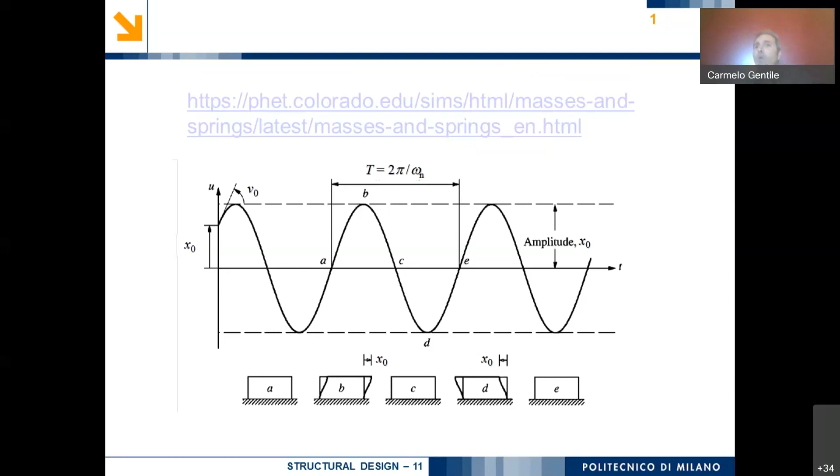But if we have several buildings on the same site, characterized by different masses, different stiffness, and so different natural frequencies or fundamental periods, we have a situation very similar to the one illustrated in this movie—the same mass connected by different springs, springs of different stiffness, to the ground.

What's happening is that when the natural frequency of the oscillation induced to the ground increases and reaches the natural frequency of one of these single degree of freedom systems, the response and also the force increases a lot.

So basically we discussed this aspect in some detail in the past lecture, and I would like to briefly recall it before beginning today's lecture. So, first of all...

Let us refer, for example, to a system like this with no damping, a certain value of the spring constant, and a certain value of the mass. As we said, when we move this system from the equilibrium position, an up and down motion begins. This up and down motion is a sinusoidal wave.

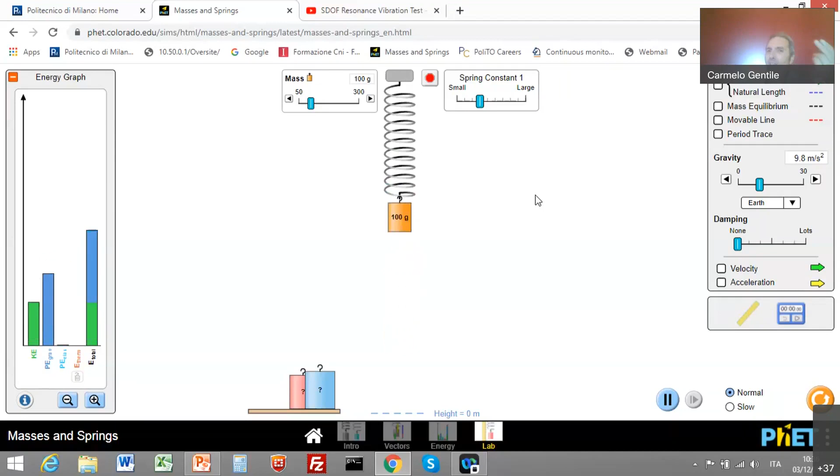In addition, regarding the effect of mass: if we increase the mass, the natural frequency decreases; if we decrease the mass, the natural frequency increases. If we deal with the inverse of natural frequency, that is the fundamental period, the effect of mass and spring changes is basically the opposite—in terms of stiffness, if I increase the stiffness, the fundamental period decreases.

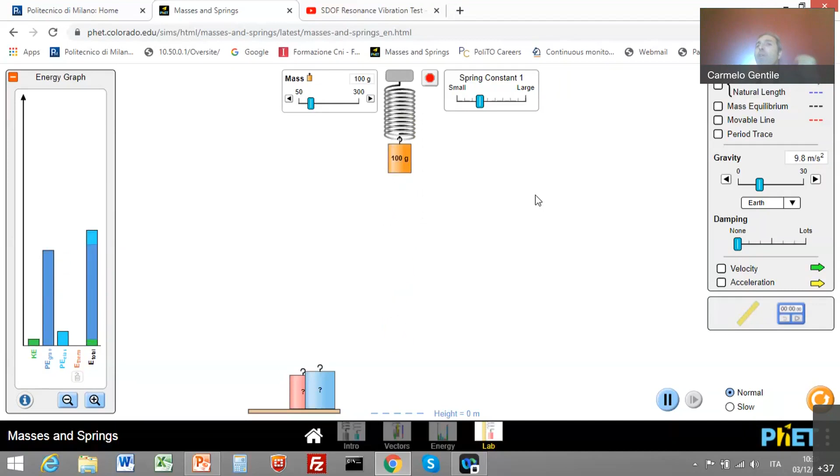On the other side, if I increase the mass, the fundamental period increases. Okay, so let's verify this, for example, first in terms of spring constant. We have seen that if the mass is not changed and we move the system far from the equilibrium position, we have a certain fundamental period.

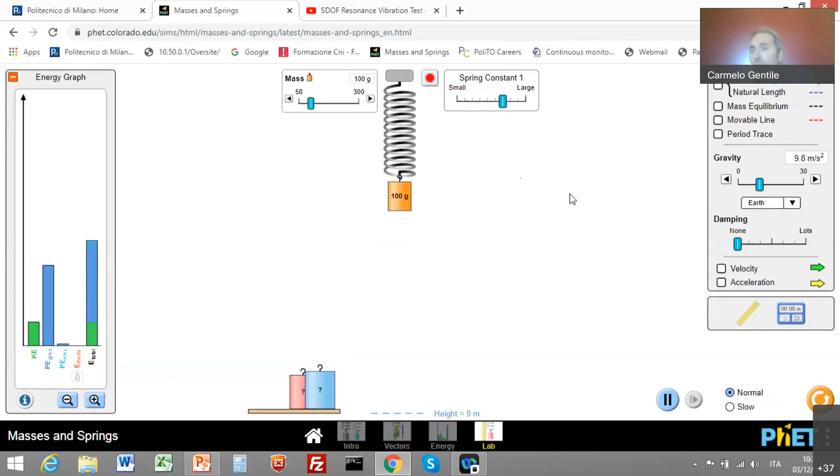If I increase a lot the spring constant, you can see that now the motion has changed and the fundamental period now is lower than before. Now we have a certain fundamental period.

Now I will decrease the value of the spring, and so we can observe that the fundamental period now is longer than before. Now let's look, for example, at this value of the spring constant, and we have a certain fundamental period.

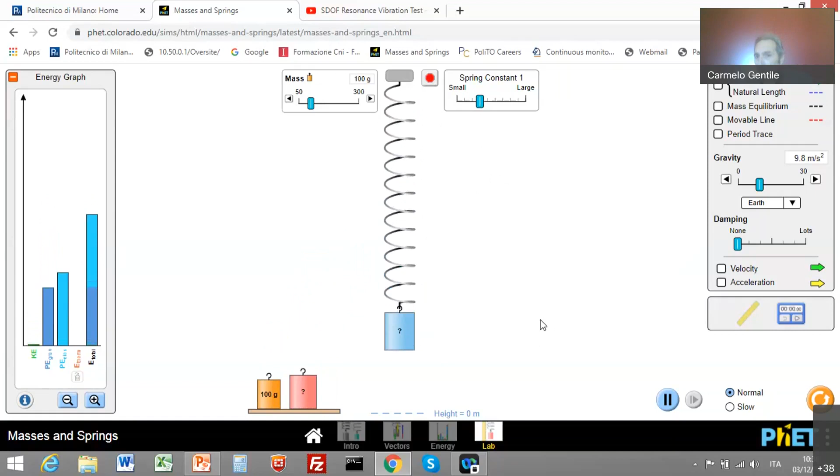Now I will change the mass and add a larger mass. So what I expect is that now the motion is slower. So the fundamental period increases by increasing the value of the mass.

And if we add damping, basically, we can see that very quickly, as damping increases, the motion stops.

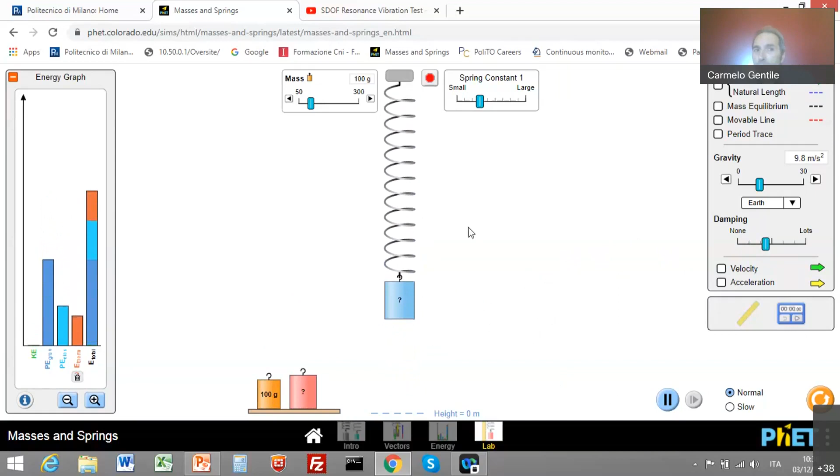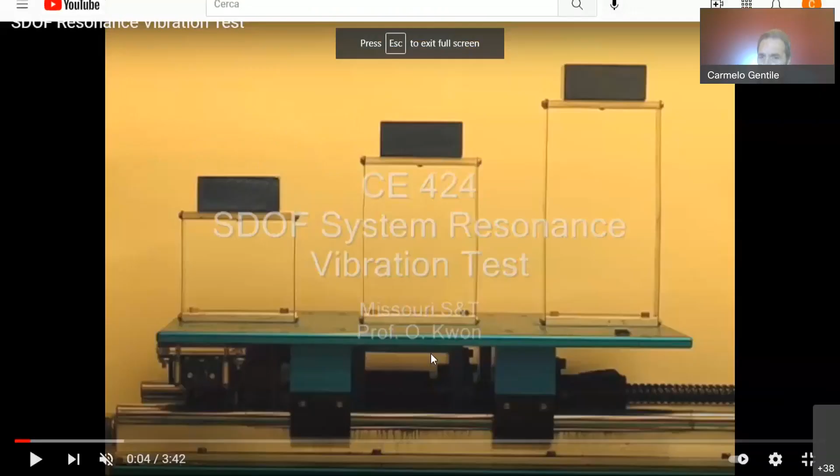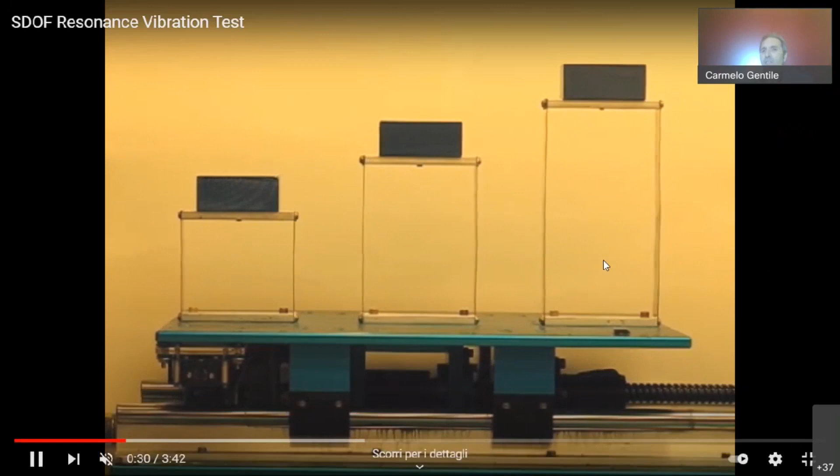We have also seen, beyond this aspect, when we have an experience like this, in which we have several single degree of freedom systems mounted on the ground, and the motion of the ground is sinusoidal, and the natural frequency of this ground motion is increasing, what we will observe, for example, for the more deformable of these single degree of freedom systems, is that at a certain point this single degree of freedom system begins to accelerate, and its motion becomes very large.

Of course, it becomes maximum when the natural frequency of the ground motion becomes exactly equal to the natural frequency of the single degree of freedom system of our building. So now you are seeing that this motion is increasing a lot. And so we have reached the natural frequency of 4 Hertz, and we have that this system is at resonance, with the great amplification of the motion.

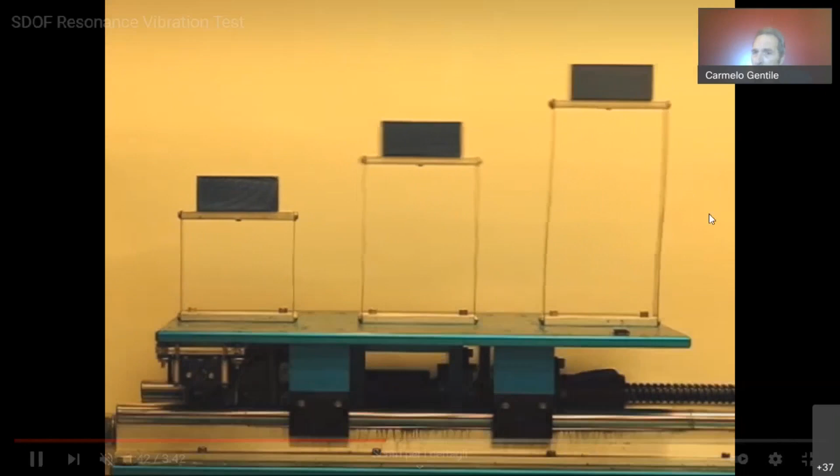When the frequency of the motion applied to the ground is increasing, we can see that this motion is decreasing while the motion of another building is increasing. And so, for example, we have the resonance, or we are very close to the resonance, of this second building, or this second single degree of freedom system.

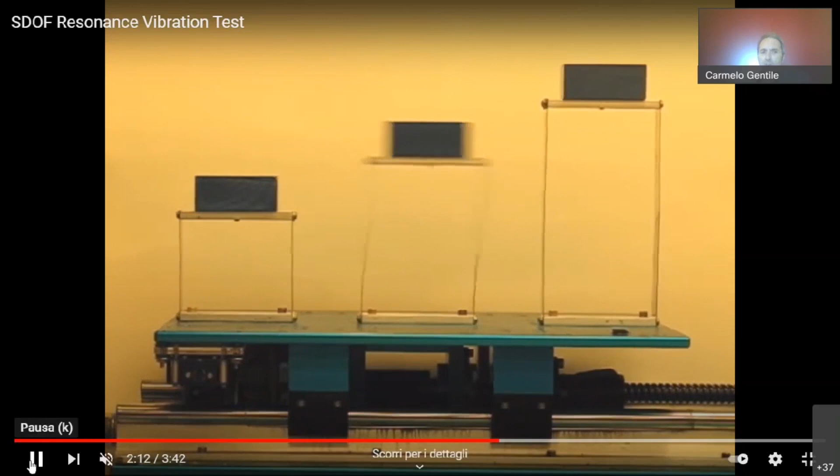So now we have the resonance of the second building corresponding to a natural frequency of 6.35 Hertz. If we continue, you remember from past lecture, of course, that there will be basically the resonance of the stiffer system.

Now, let's go back to our slide and to the content of our lecture. Of course, my idea is to analyze very quickly, basically, the equation describing this kind of mechanical phenomenon.

We can basically refer for the basic behavior of a real structure, of a real building, for example, to a single degree of freedom system. And from a dynamic standpoint, we can imagine that a single degree of freedom system is a mass which is connected to the ground by a spring, by a column, by some stiffness, and also by some dashpot. The dashpot is responsible for the dissipation of energy.

So in practice, when this single degree of freedom system is subjected, for example, to an external force which is depending on time, and the external force is denoted as P, we have an acceleration, a velocity, and one displacement of the system.

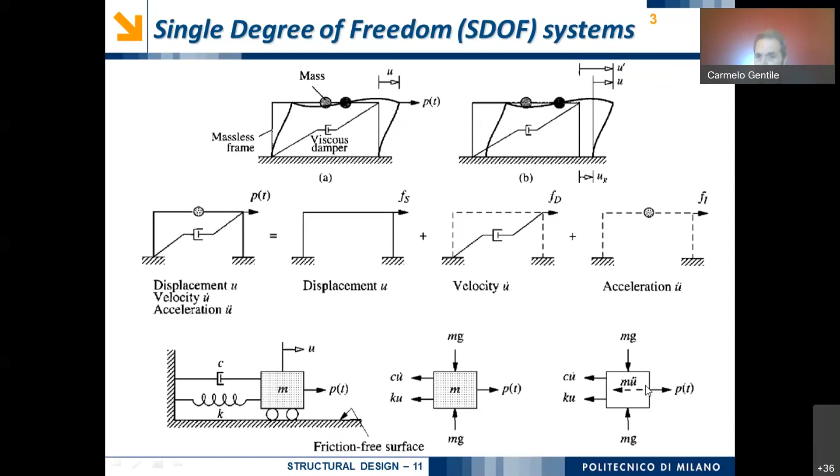There is also a dissipation force, which is proportional to the velocity, and also this dissipation force tends to bring back the system to its original equilibrium. Also, the inertia force is directed against the acceleration. And so we have these kinds of forces.

Of course, if we are dealing with a simple building, we can observe that this simple building behaves as a single degree of freedom system, because we have the mass concentrated in this rigid block, and then this rigid block is connected to the ground through flexible columns, and so we have something like this.

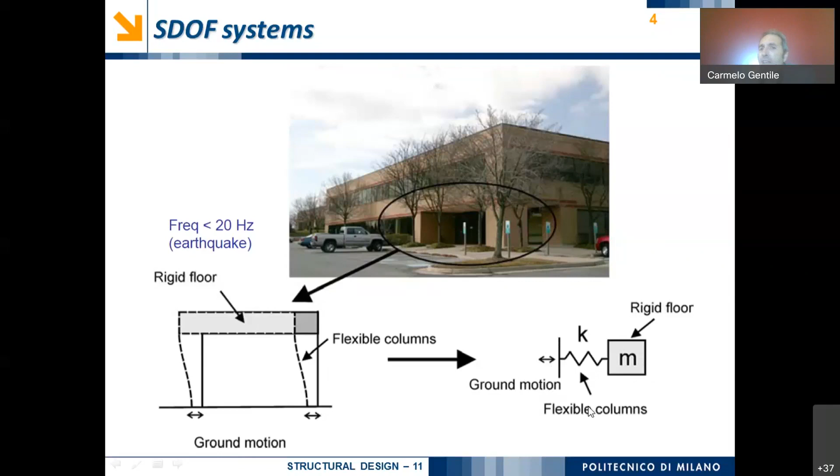So this is the ground, possibly subject to a certain motion. Here is the mass of the building, which is basically concentrated at the level of the rigid floor, and here there is the stiffness K of the flexible columns.

But of course, we can also imagine some different type of single degree of freedom system, like, for example, an offshore platform, which is generally a stiff mass connected to the ground, in this case through flexible foundations, or the body of a rigid car, where the body is a stiff element connected to the ground through the flexible suspension. So the flexible suspension acts like some deformable springs.

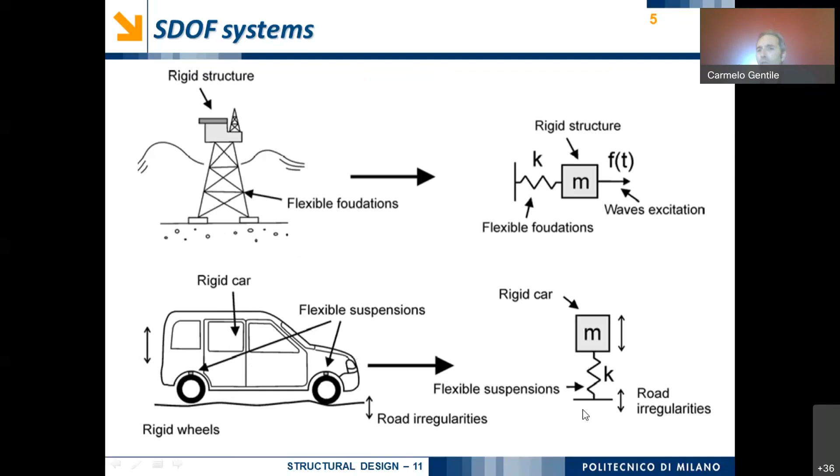Okay, if first of all we neglect the presence of dissipating action, when we have a single degree of freedom system under the action of a certain force F, and the force F is depending on time, at each time instant there will be equilibrium between this external force, the inertia force, which is the mass times the acceleration x double dot, and of course the elastic restoring force, which is K, the stiffness of the spring, times the displacement x.

Okay, now first of all, let's imagine that the external force is equal to 0. So we have exactly a free vibration. Basically, we move our single degree of freedom system from its equilibrium position, and so we expect that the solution of this problem is a sinusoidal motion.

It is very easy to obtain this. In fact, we can very easily verify that the solution of this equation is x equal to capital A exponential of RT. In fact, the second derivative of exponential of RT is R squared exponential of RT. And so we obtain this kind of characteristic equation. If we substitute this one inside this equation, we obtain mr squared plus k equals 0.

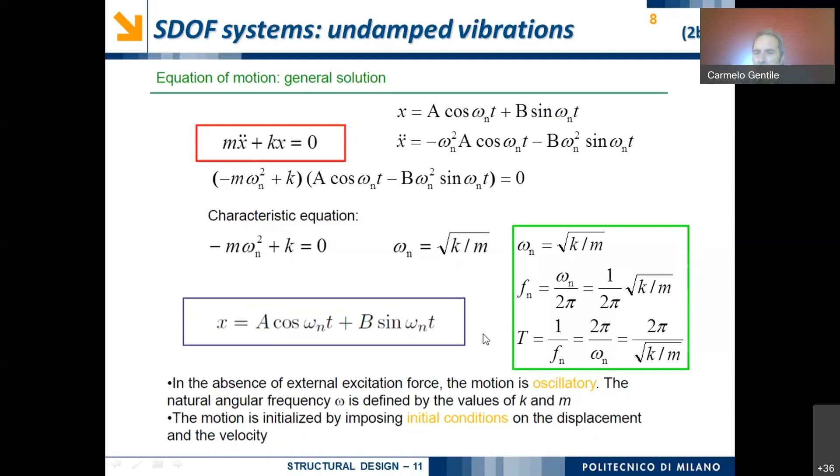So once we have understood how stiffness and mass affect the value of fundamental frequency or natural period, we can clearly know which are the expected dynamic characteristics of our single degree of freedom system, since we are neglecting the dissipation of energy. Basically we have to expect a sinusoidal motion.

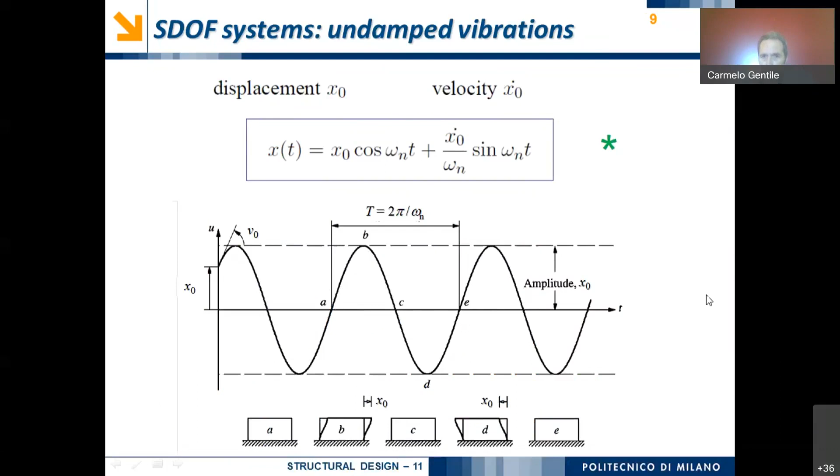Okay, so now let us continue to think that the dissipation of energy is not considered. But now let's apply a sinusoidal motion with an applied circular frequency of omega. We have seen from the results of our movie what we expect.

That when the frequency omega of the forcing function reaches the natural or resonant frequency of the single degree of freedom system, we have a great increase of the response. This might be very easily evaluated, because if we apply a force denoted as capital F times exponential of I omega t, we can observe that the solution is in terms of capital X times the same exponential.

Now let us substitute this F and this X in this equilibrium equation. We observe by doing this that we have K minus omega square m times X times exponential of I omega t, equal to capital F times exponential of I omega t. Of course, in both sides of this equation, I can simplify the exponential.

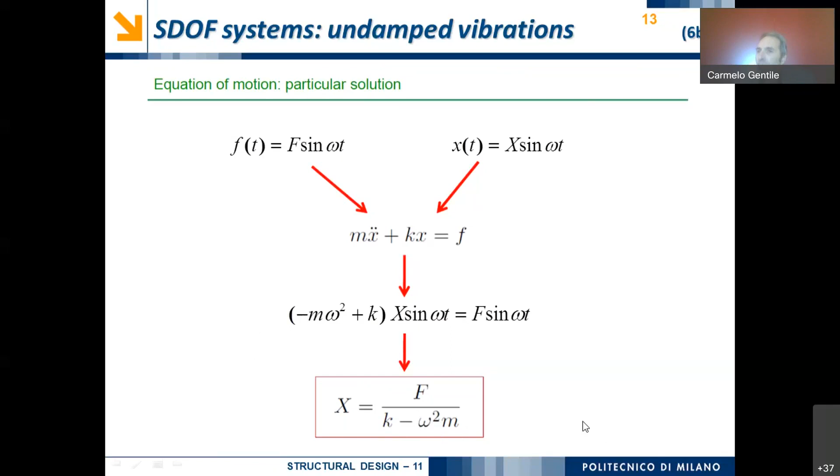Similarly, and we expect this, it depends on the dynamic characteristics of the system, because it depends on K and it depends on M, so on the stiffness and the mass of the system, but it also depends on the frequency of the applied motion. So the frequency content of the earthquake is an important parameter.

If we observe that the ratio between F and K, that is the value of X for omega equals 0, is the static displacement. So it's what we expect when we apply statically to our spring a force F. The spring has a displacement whose value is equal to F over K.

So if we denote the static displacement as x0, we can observe that this value might be expressed as x over x0, the actual value of the displacement corresponding to the value of omega. This is x over x0, and it is equal to 1 over 1 minus omega square over omega square n.

And so we observe in particular that when omega is equal to omega n, the denominator will be equal to 0, so we have an indefinite amplitude of the motion. There is a large amplification of the motion. This is exactly what we have seen, that when the frequency of the forcing function becomes equal to the frequency of resonance omega n, we have a great amplification.

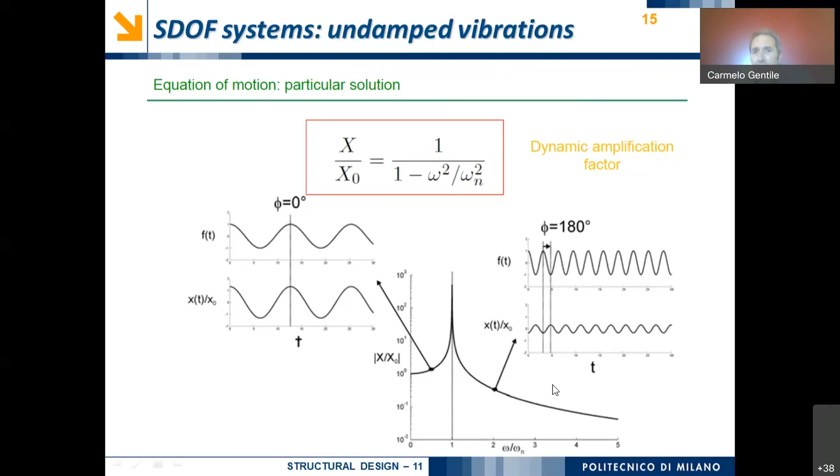Otherwise, when we move over the resonance, the dynamic amplification factor begins to decrease. This is exactly what we have observed in our movie. And of course, we can obtain this kind of behavior directly from the equations in a very easy way.

Of course, we can also introduce the action of damping, and we will do this very quickly. But in addition, for example, it is interesting for us to predict the value of the fundamental period of a building. If we refer to a real building exhibiting a height lower than 40 meters.

With a mass distribution which is approximately uniform, we can say that the fundamental period is the product of a constant c, depending on the type of structure, times h elevated to 3 over 4.

The coefficient c is equal to 0.085 for steel frame buildings, 0.075 for reinforced concrete frame buildings, and 0.05 for other buildings. For a historic masonry tower, the fundamental period can be taken as...

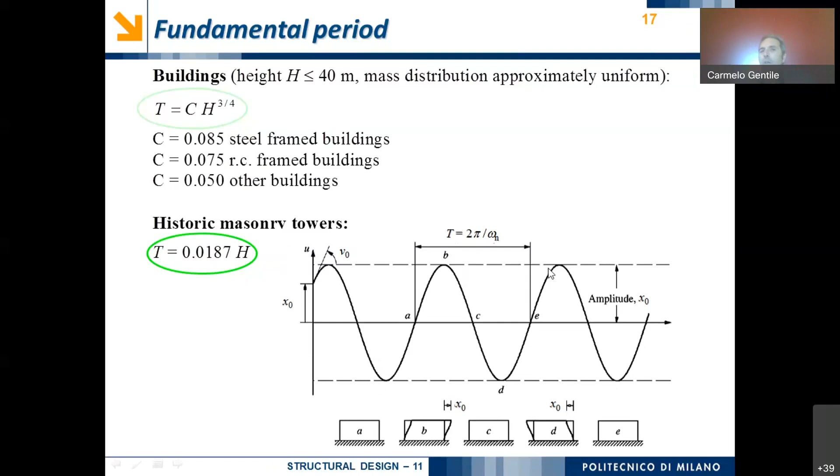Of course, these fundamental period formulas are given directly by our standard codes. For example, these values are contained in the Italian NTC emitted in 2018.

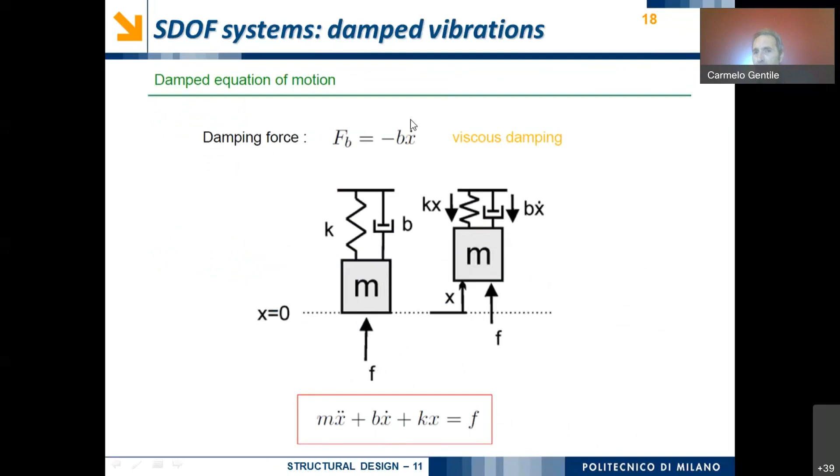As I said before, I can easily introduce damping. The damping in the equation of motion is introduced through a term proportional to the velocity. If we first refer to a free damped oscillation, with no external forces, it's generally better in this case to divide both sides of the equation by the mass of the system.

By doing this, we can introduce a coefficient xi, called the damping coefficient, which equals b over 2 times the square root of k times m. With this, the equation of motion takes this form.

Now, if we say that the applied force is equal to zero, we have the equation of free damped motion. The general solution is exactly as before, capital A times exponential of rt. We can write the characteristic equation by differentiating once and twice with respect to t, obtaining a characteristic equation.

In this case, we find that the free damped motion might be oscillatory or not, depending on whether the damping factor is lower than 1, equal to 1, or larger than 1.

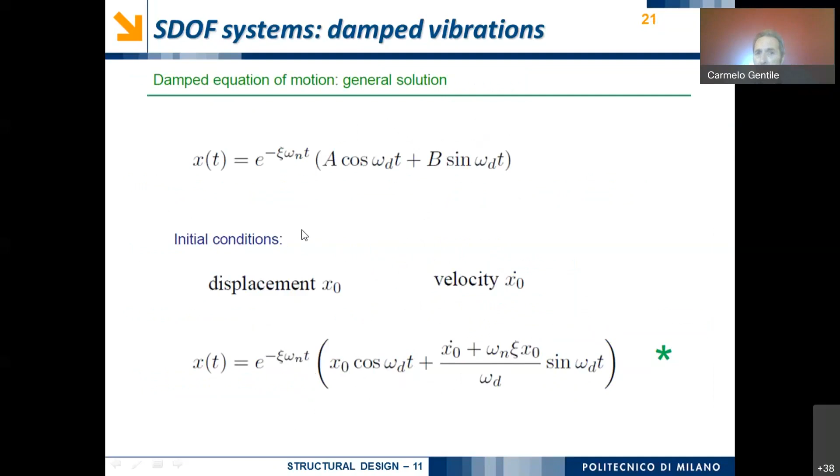When the damping is exactly equal to 1, we have the maximum motion at the beginning, and afterward there is no oscillation — a critically damped system without any oscillation. But in the field of engineering structures, the general solution is a free damped motion, something like what is illustrated in this slide.

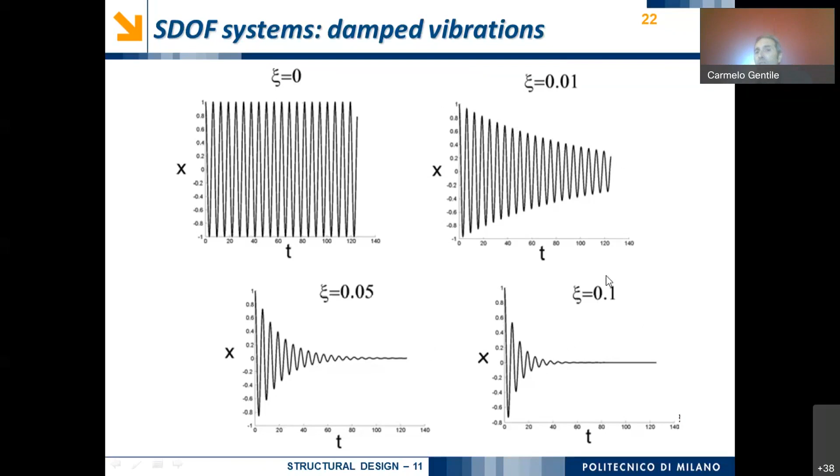In the case of zero damping, the amplitude of the motion never decreases, as we observed in our example. If we begin to increase the value of the damping coefficient, we start to see dissipation of energy, and the amplitude of the motion begins to decrease over time — more quickly as we increase the damping coefficient.

When I talk to students about this phenomenon, I always stress: don't think these equations don't represent real behavior. Even though they're very simple, these equations represent the real behavior of a building. From my experience working on real structures, I can show an example of this.

You can see that this building is a real historic tower in the town of Mantua. It is 54 meters high — basically the highest monument in Mantua, the tallest building there.

There was a visual inspection of this structure using an aerial platform. During this inspection, the platform, due to a mistake, hit against the tower — a small hit. So in this case, we have a typical free damped oscillation.

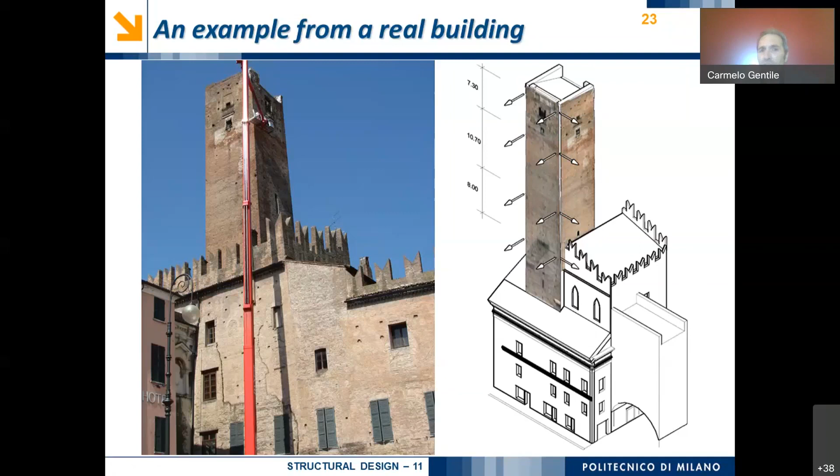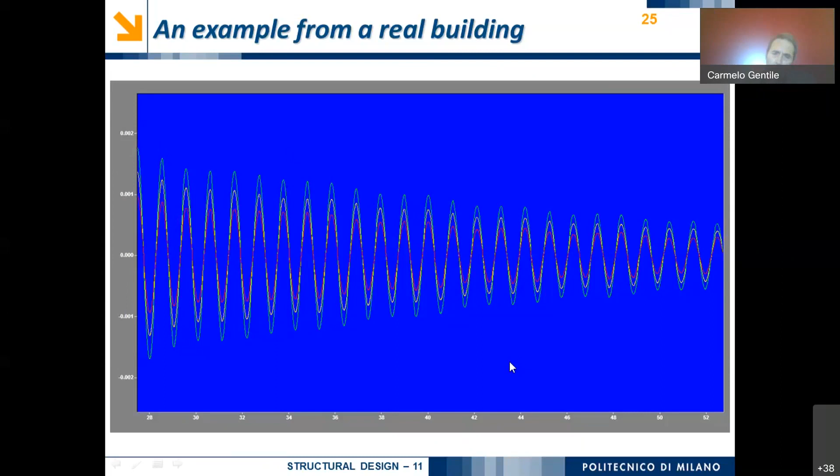So it is a sinusoidal wave whose amplitude is decreasing in time, and it is decreasing by an exponential curve, or something very similar to an exponential curve.

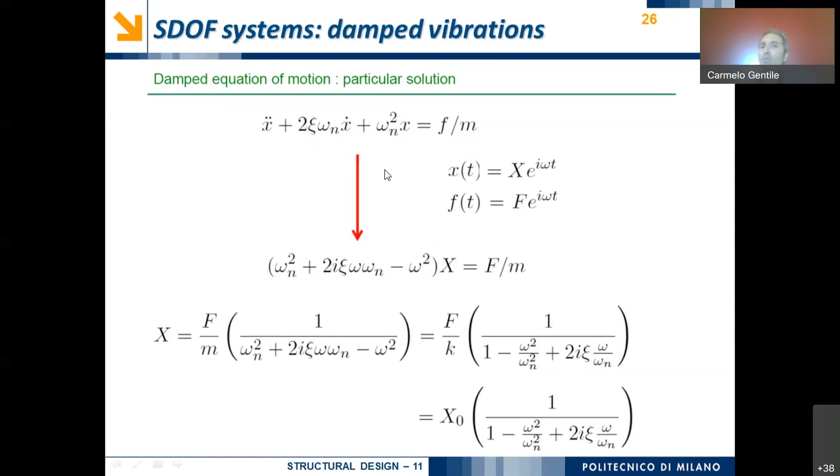Of course, we can also apply this in the case of viscous damping with an applied force. For example, we can apply a sinusoidal force. We can expect a behavior similar to the previous one, with the amplification factor increasing as the frequency of the external force approaches the resonant frequency.

But in this case, there is also an effect of the damping. So the amplitude of this peak, which was equal to infinite in the previous case when we had no damping, becomes lower and lower as we increase the dissipation of energy.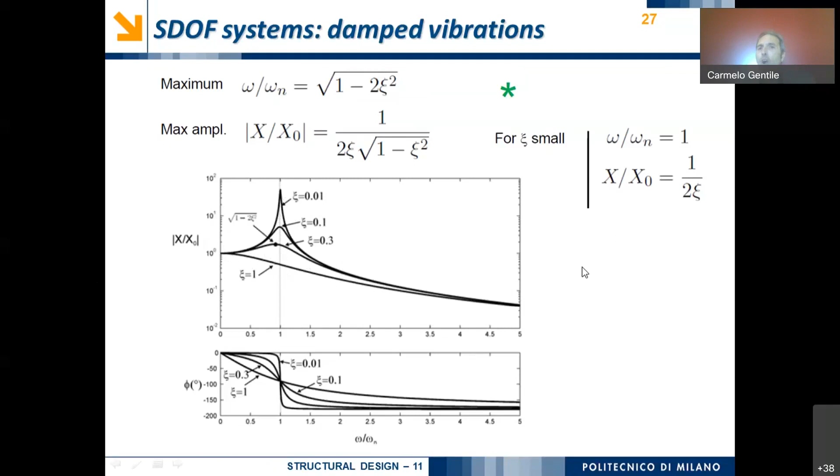Okay, this introduction is in order to have the possibility of writing and beginning to discuss the equation of motion of a damped building under earthquake. Because generally, when we are dealing with a real structure, we approximate it as a single degree of freedom system, as a building, for example.

Generally, we have to remember, first of all, that the inertia forces are proportional to the acceleration. Which kind of acceleration? The absolute acceleration. When there is no ground motion, the acceleration of the mass is exactly equal to the absolute acceleration. But when we also have a ground motion with ground acceleration x0 double dot, the absolute acceleration is the summation of the acceleration relative to the ground, x double dot, plus the acceleration of the ground.

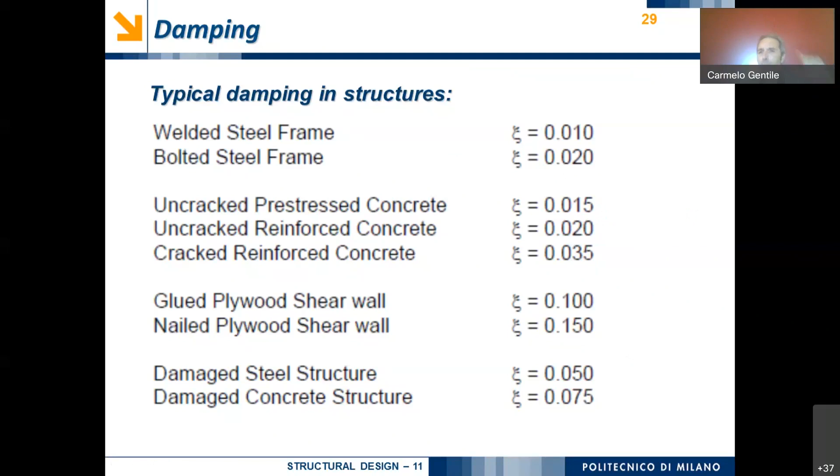We know that if we have a column characterized by a certain height, a certain Young's modulus, and a certain inertia moment, we can easily evaluate the stiffness. But if we want to evaluate the mass, we have to remember that in practical computation, the mass is given by the value of the weight, for example in kilonewtons, over the acceleration of gravity, g.

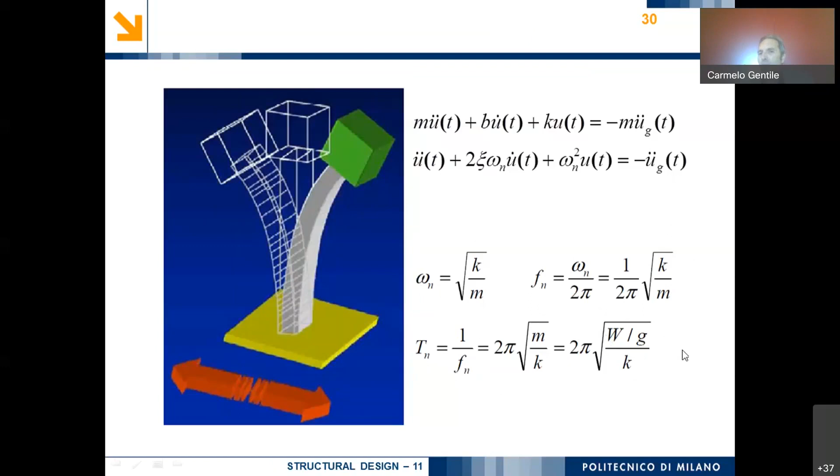G is equal to 9.81 meters per square second. Okay? So please remember the equation of motion for a simple building or a single degree of freedom system. Please remember the different relationships between fundamental period, natural frequency, and circular frequency. Please remember that we evaluate the mass as the ratio between the weight and the acceleration of gravity.

Now, since we are talking of seismic response, once I have understood how it is possible to evaluate the response of a simple building, represented by a single degree of freedom system, to an earthquake, let's try to evaluate the response. So I know which is the building, and so I know the circular frequency and the damping of the building, and I have also measured a certain ground acceleration.

u double dot g. Now it is possible for me to integrate the equation of motion of this single degree of freedom system, and so, for example, I can evaluate the evolution in time of the deflection, of the acceleration, of the velocity.

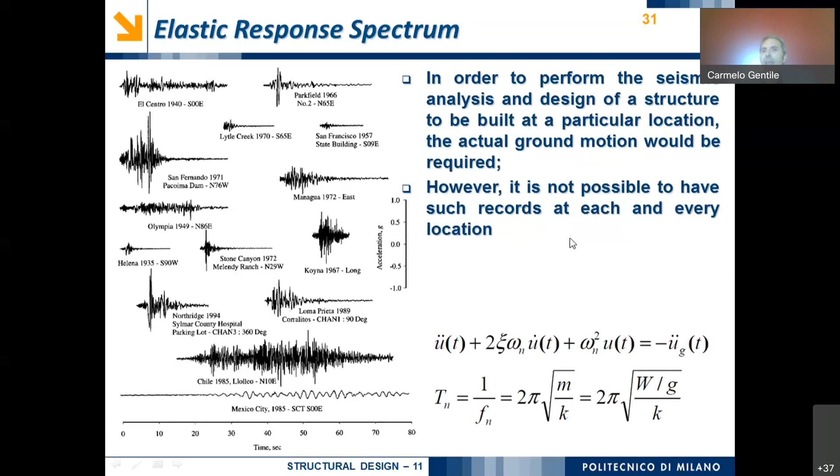But of course, even if at a certain location I have a large collection of earthquakes recorded in the past, it is not possible to have such a record at each and every location. So in order to make a seismic analysis, I have to do some approximation.

First of all, I have to consider that the seismic analysis of a structure cannot be carried out simply based on the peak value of the ground acceleration. We said during the past lecture that the seismic hazard is represented by the peak ground acceleration, but of course the peak ground acceleration by itself is not enough, because we know that different buildings are responding in a different way to the same earthquake.

This is because there is a dependency upon the frequency content of the ground motion and the own dynamic characteristics of the buildings. Own dynamic characteristics of the buildings means natural frequencies and mass and stiffness of the building. So, to overcome this difficulty, the earthquake response spectrum is the most popular tool in the seismic analysis of structures.

But what is the earthquake response spectrum? Let's see. First of all, we have to consider another aspect. If we consider, for example, a certain building, and we imagine that the expected service life of this building is 50 years, at that site we have the possibility of having different earthquakes.

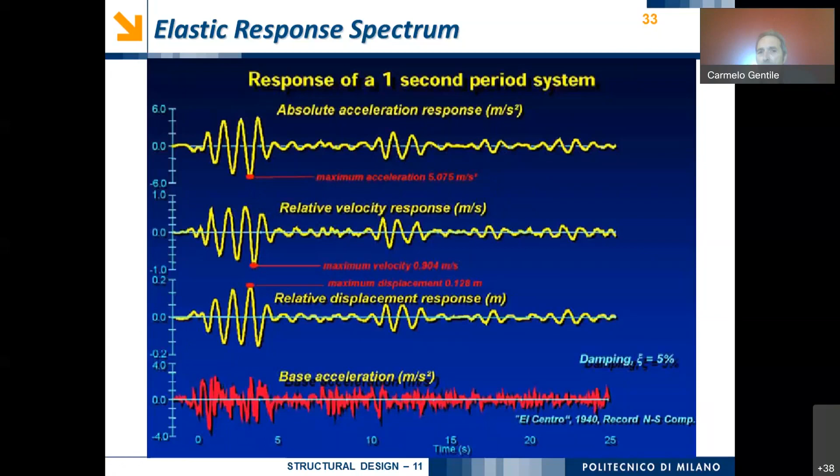So, for example, at this time instance, I will obtain a maximum acceleration of more than 5 meters per square second. More or less at the same time instant, I will obtain the maximum displacement, which is equal to about 0.13 meter, so 13 centimeters, for a damping value of 5%. But let's try to do this.

So let's try to apply the same earthquake to different single degree of freedom systems, characterized by different values of the fundamental period, or the natural frequency. For example, first fundamental period 0.5 second, second fundamental period of 1 second, third fundamental period of 2 seconds. And let us maintain, for example, the value of the damping.

Afterwards, we can maintain the value of the fundamental period, but increase the value of the damping. For example, 0% damping, 2% damping, 5% damping. Each time I change the dynamic characteristic of my building, which means changing the mass and stiffness, so the fundamental period, or the damping, the dissipation of energy. I will obtain a different response.

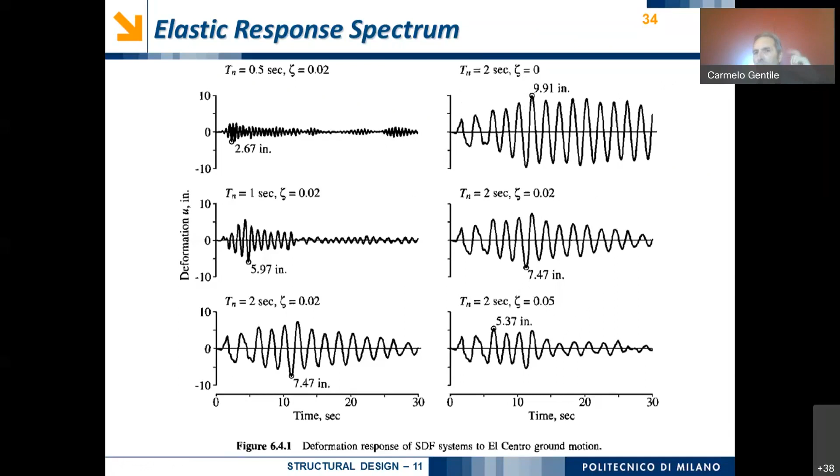So different response at every time instance. You can see that this response is different than this second time history, which is in turn different from the third time history. And if we look, for example, on the right hand side plot, we can observe that the response is different there too. As expected, when we increase the damping coefficient, the amplitude of the forced response is decreasing.

So when we are talking of elastic response spectrum, what we mean is that we are referring to the maximum response of a single degree of freedom system to a particular input motion.

So my idea is, first, let us refer to a very special input ground motion, for example, the one recorded in 1940 in El Centro. Let us assume the damping is 5%. First, I will refer to a certain single degree of freedom system, characterized by a certain value of mass and stiffness, which means a certain fundamental period or frequency. I will obtain a certain value, for example, of displacement.

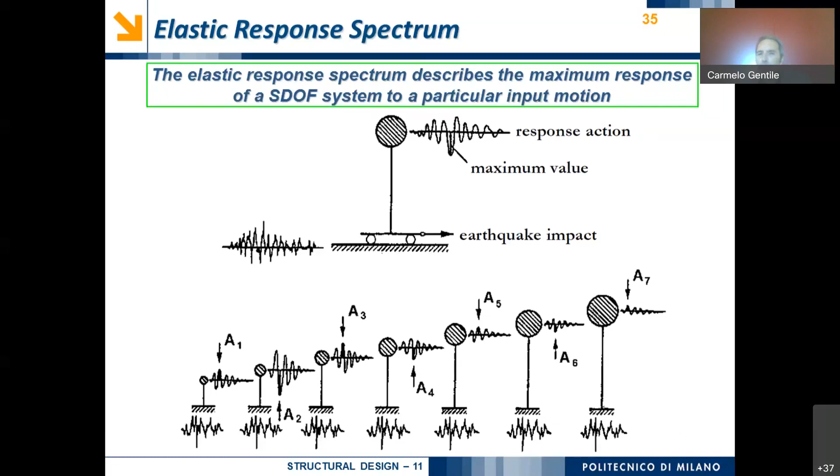All these buildings, characterized by different natural frequencies and fundamental periods but the same damping, are subjected to the same earthquake. So I can define an elastic response spectrum in terms of maximum displacement, maximum velocity, maximum acceleration. Every maximum response depends, of course, on the ground acceleration, but also on the fundamental period of the building and on the damping ratio of the building. This is the typical computation of a response spectrum or elastic response spectrum.

For example, first I consider a single degree of freedom system, or building, characterized by a fundamental period of 0.5 seconds. I obtain the maximum response and put it here. Afterwards, I can consider a different fundamental period of the building, for example 1 second and 1.5 seconds. I compute the maximum displacement and put it here and here. So by changing the fundamental period of our single degree of freedom system, while maintaining the same damping and the same earthquake, I obtain the maximum response of several buildings.

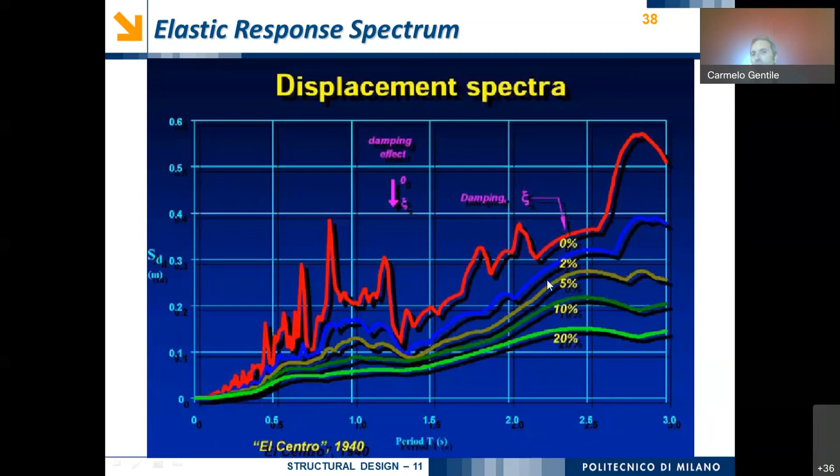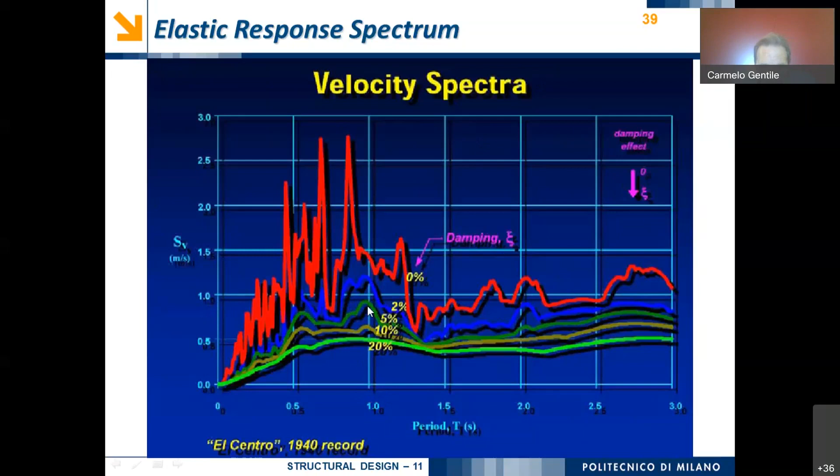So it is possible to define similarly a velocity spectrum. For example, for 5% damping and a building with a fundamental period of 1 second, the maximum velocity at the top of that building will be this number here. Of course I can also obtain the maximum response in terms of acceleration, the so-called response acceleration spectra.

When dealing with each of the elastic response spectra, the characteristic of having decreasing response with increasing damping is common.

But in practice, what we will do is obtain for each single degree of freedom system the maximum displacement, then the maximum velocity, and afterward the maximum absolute acceleration. What we actually do in practice is evaluate the response spectrum in terms of displacement, and afterwards obtain the so-called pseudo velocity response spectrum and the pseudo acceleration response spectrum.

The pseudo velocity response spectrum is simply the displacement response spectrum times the resonant frequency, the circular frequency of our single degree of freedom system. The pseudo acceleration response spectrum is the spectrum of displacement SD times omega n squared, the square of the circular frequency, which is the ratio k over m. So for the elastic response spectrum in terms of pseudo acceleration, we just multiply the displacement spectrum by k over m.

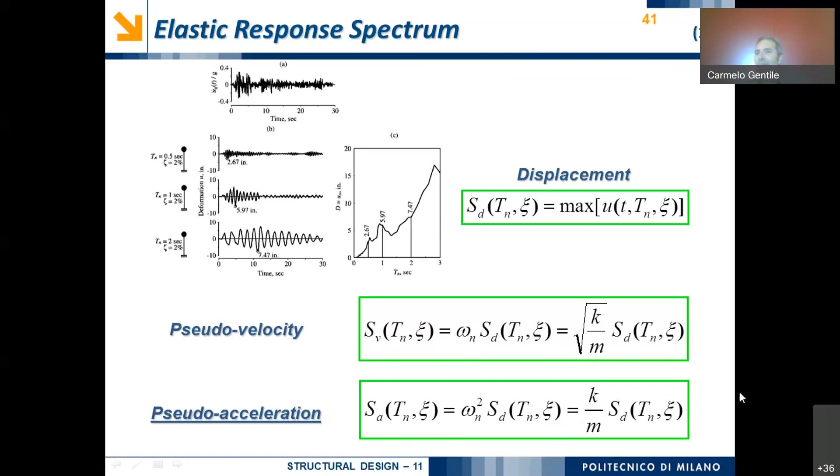It is quite obvious to associate a physical meaning to the so-called pseudo velocity and pseudo acceleration. First, let us consider the elastic potential energy in our spring due to maximum deflection. If we have a maximum displacement SD, the maximum potential energy is 1/2 times k times SD squared. If I divide this energy by m, I obtain k over m, but k over m times SD squared is omega n squared times SD squared, which is exactly the square of pseudo velocity. So this energy might also represent the kinetic energy, 1/2 m times the pseudo velocity squared.

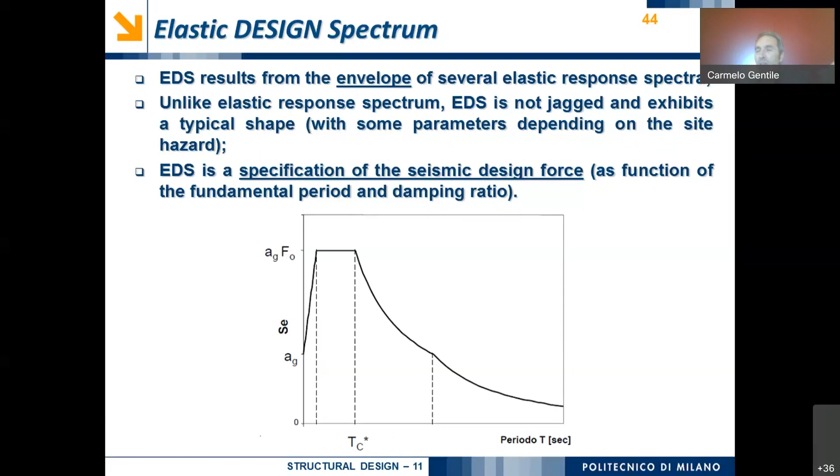So from the elastic response spectrum, once I have evaluated the fundamental period and the damping ratio, I can obtain a value of the pseudo acceleration. Afterwards, I will multiply that value of the pseudo acceleration by the mass of the building, and then I obtain the design force. Of course, I can do this for each limit state that I'm going to consider.

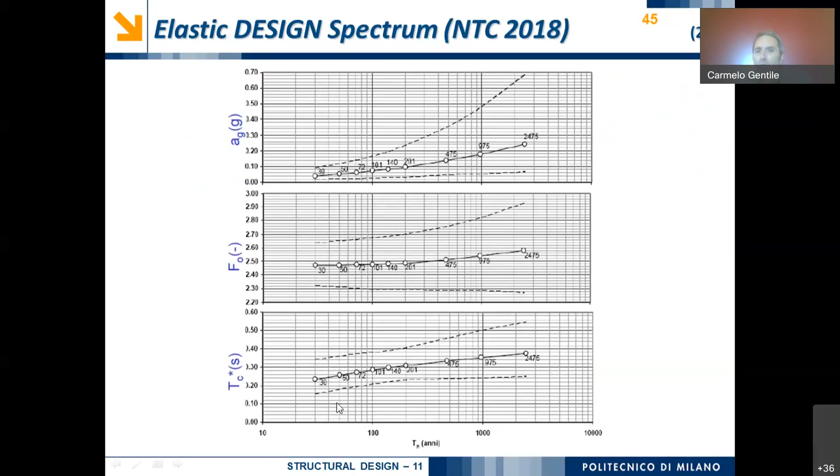There are different limit states corresponding to different return periods of earthquakes. For example, if the site of my building is characterized by its geographical coordinates, longitude and latitude, I can obtain this value, and then for a return period of 30 years, 50 years, or 72 years, or whatever we want, we can obtain this value. This is the peak ground acceleration. For example, for 30 years of return period it is 0.177 G. For a larger return period, we will obtain a larger value of the peak ground acceleration.

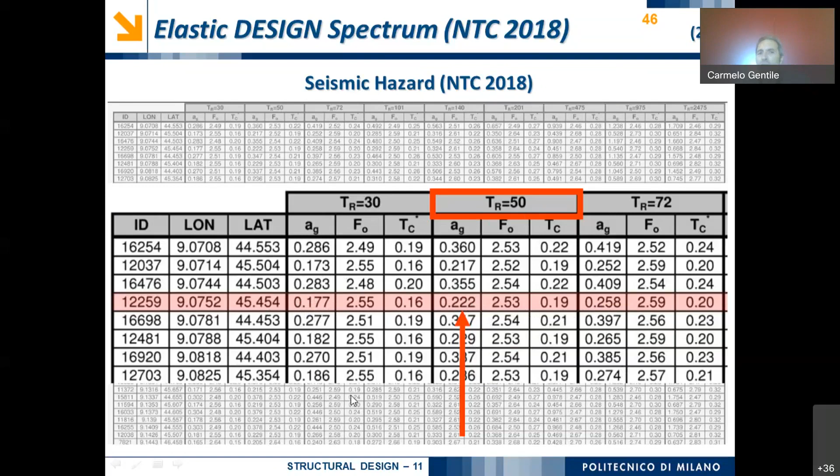The other coefficients are modulating the shape of the elastic response spectrum. In the Italian code, generally we refer to a service time period of a building of 50 years, but to different return periods, each corresponding to a different limit state.

Generally, we are dealing with a damage limit state corresponding to a return period of 50 years, and the loss of life limit state corresponding to a return period of 475 years. So basically, we are considering the damage limit state for which the structure does not exhibit any kind of structural damage; it behaves in the elastic range.

Afterwards, we consider the return period corresponding to 475 years. For this return period, we can accept severe damage of the structure, but no collapse, so no loss of life. Generally, we design our building for the loss of life limit state, and if that is ensured, in the Eurocodes we also assume that the damage or elastic limit state is fulfilled as well.

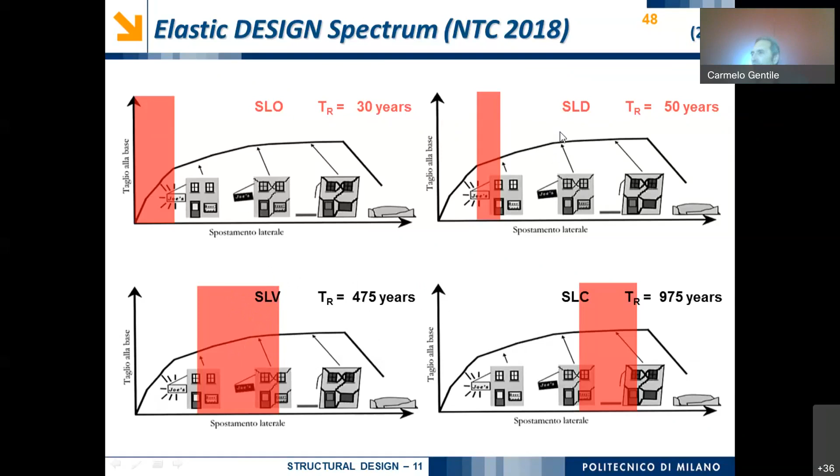What we are doing when we make an elastic design is: I know which is the site of my building, and I decide that I will refer to the limit state of no damage. If I refer to the limit state of no damage, and I know the latitude and longitude of our site, from this value we can obtain the peak ground acceleration, but also the value of F0, and the other coefficients defining the shape of the horizontal component of the design spectrum.

Generally, I also assume that the damping ratio is equal to 5%. If the damping ratio is larger than 5%, I can obtain this coefficient eta, which is lower than 1, and then I can modify the expression of the elastic design spectrum using the value of eta resulting from this formula.

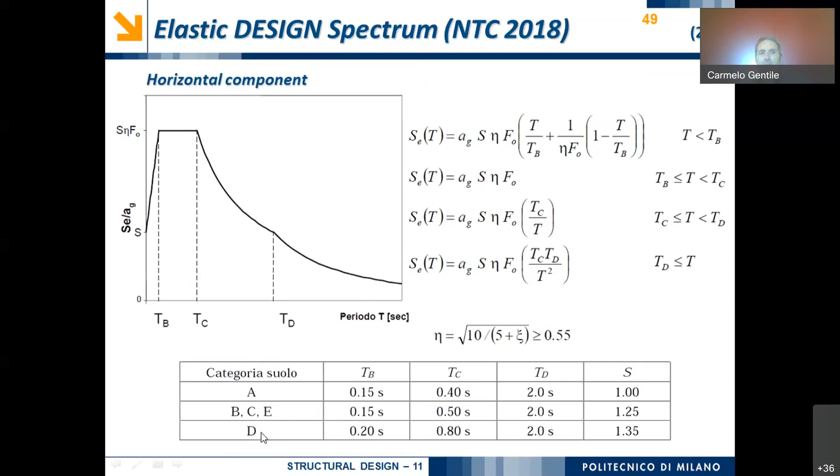In addition, I can also have some coefficients ruling this shape that depend not only on the geographical coordinates of the site, but also on the type of soil - if it is a stiff soil, category A, or a very soft soil, category D. So we have some shape modifications of the elastic design spectrum.

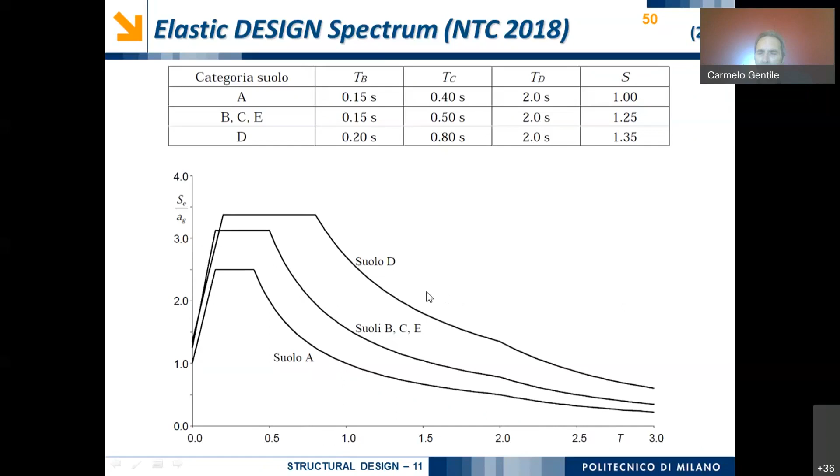If I know, for example, that the soil is soil A, and I assume that the fundamental period is equal to 1 second, I will obtain this value of the pseudo acceleration, and then I will multiply this value of the pseudo acceleration times the mass of the building in order to obtain the seismic force. But of course, this is what we are going to do if we are designing for ideal elasticity.

So, for example, we are mentioning a design made for no damage to our building. But we have also mentioned that it is possible to make our design by accepting a non-linear behavior of the structure and large damage without collapse. So we have to understand how it is possible to modify the elastic design spectrum to account for the non-linear behavior of the building.

When a building behaves in a non-linear way, there are two aspects mainly related to this. The first aspect is that we are in the non-linear range, so the structure is damaged. But if a structure is damaged, it means the stiffness of the structure decreases, and we know that if the stiffness decreases, the fundamental period increases.

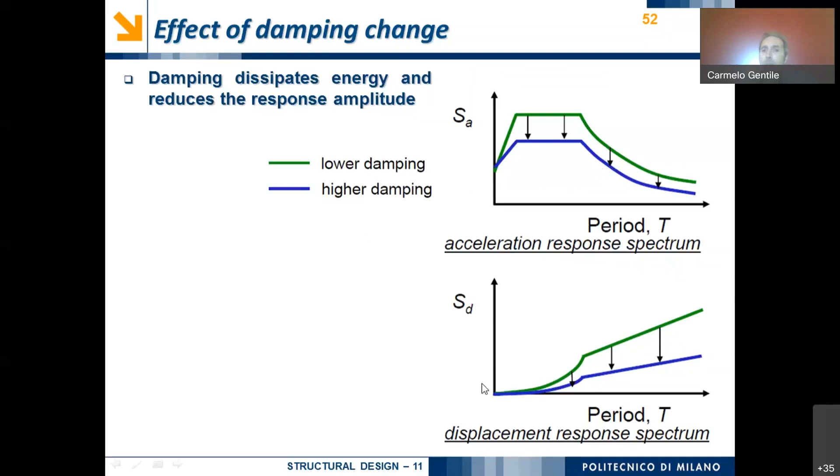A similar result is obtained when we have damage of a structure, because an aspect closely related to damage is an increase in dissipation of energy. The structure is cracked, and there is dissipation of energy between the two parts of the crack due to slip and friction. So the damping increases, and higher damping generally generates both a decrease in the applied acceleration and forces and in the displacement response.

So the idea in the code is: from the knowledge of the site and the seismicity of the site, I can obtain an elastic response design spectrum. This is the force needed to be sustained by the building in the elastic range. But if I want to design for the inelastic response, it is possible to understand how to modify the elastic design spectrum in order to obtain the inelastic design spectrum.

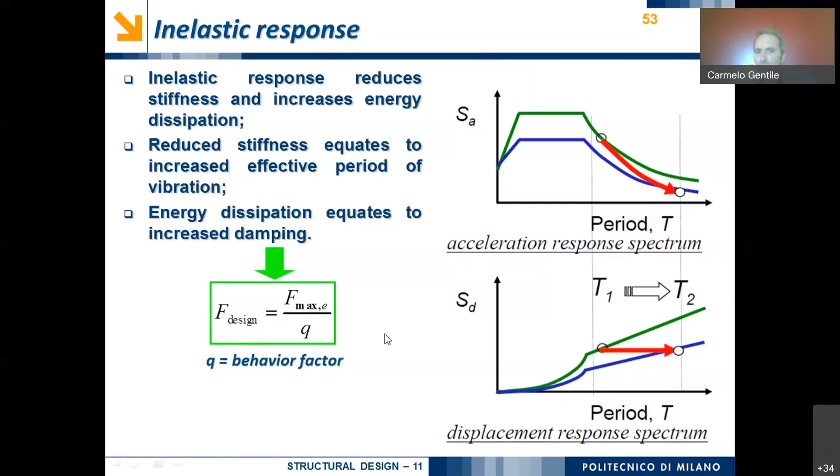What is generally done is that we divide the elastic design spectrum by a coefficient larger than 1, denoted in the literature as Q, named the behavior factor. The value of Q, the behavior factor, accounts in an overall way for the inelastic response and the ductility.

But let us remember that we have inelastic response at several levels, starting from the level of materials. Steel is the typical material exhibiting ductile behavior, if instability does not occur. So basically steel is very ductile, but we also need the material behavior to be stable in time.

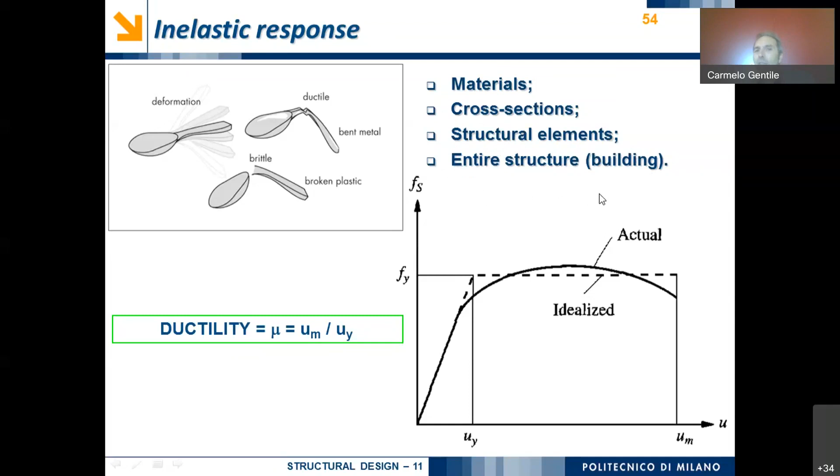But of course, if I have a ductile material, I will also have a ductile cross-section. If I have a ductile cross-section, I will also have ductile structural elements in terms of beams and columns. And if an entire structure or building is made of ductile structural elements, I can also have an overall ductile behavior of the entire structure or building.

So basically, I can define different types of ductility. In terms of strain, it is generally defined as the ratio between the ultimate strain and the first yielding strain. In terms of curvature for the cross-section, it is defined as the ratio between the ultimate curvature and the curvature at first yielding. But also in terms of displacement, of a structural element or an entire building - for example a column or the overall building - the displacement ductility is defined as the ratio between the ultimate displacement and the displacement at first yielding.

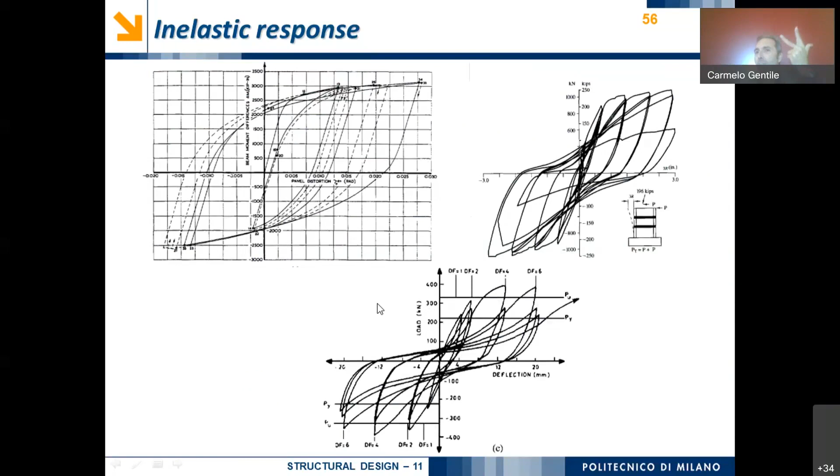And of course, since I need an inelastic response which is stable in time, generally all international and national codes mention that we need to have at least 3 stable cycles of nonlinear behavior.

So generally, when we have no ductility, we have basically an elastic response, and the ductility in terms of displacement is equal to 1. So it means that the ultimate displacement is equal to the first yielding displacement.

When the ultimate displacement begins to become larger than the first yielding displacement, we can have a moderate displacement ductility, for example in the order of 1.5, or very large ductility, for example in the order larger than 3.5.

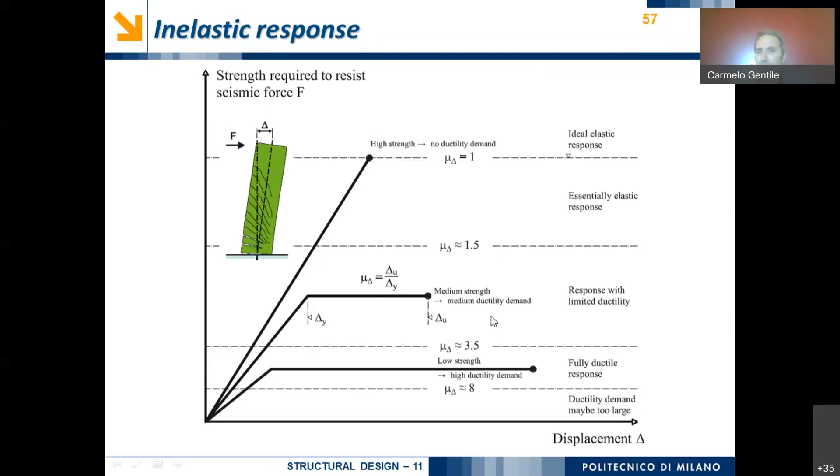But now, the question is how it is possible to transform the elastic design spectrum into an inelastic design spectrum. In order to do this, we have to mention two important behaviors. The first is the so-called equal displacement principle.

The equal displacement principle is applied to structures that are characterized by long fundamental period. So the idea is that when I compare the elastic behavior of my system to the inelastic, or elastic-plastic, behavior of my building, we have that...

...there is an equal displacement of the elastic system and of the elastic-plastic system. If the elastic-plastic system undergoes the same displacement as the elastic system, I can reduce the elastic force to the inelastic one by dividing by the displacement ductility. So the behavior factor in this case is the ratio between the ultimate displacement and the first yielding displacement. For the short periods, this is a special range, because our structure is very stiff.

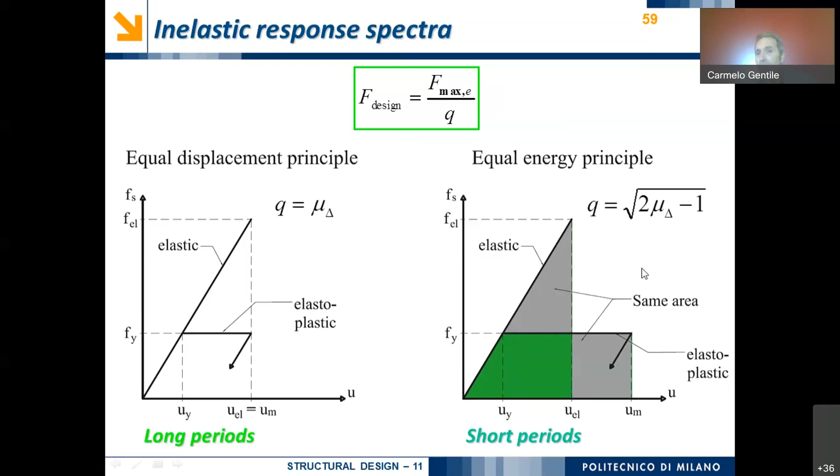So basically, the idea is that in the elastic-plastic behavior and in the elastic behavior, there is the same energy absorbed by our system. But in one case the system is elastic, and in the other case the system is elastic-plastic.

So we can reduce the elastic response spectrum by dividing by a coefficient eta, which is equal to 1 over Q, where Q is the behavior factor. For different values of the behavior factor, ranging from moderate to higher values, we are modifying our elastic response spectrum into our inelastic response spectrum.

So the level of ground acceleration for which we design our system is not the one corresponding to the elastic design spectrum, but the one corresponding to the inelastic design spectrum. So it's a lower level of acceleration, and since we multiply acceleration by mass, it also means a lower level of the applied force.

So let's try to make an important summary. First of all, the elastic response spectrum describes the effects of just one earthquake on structures that are characterized by different natural periods and generally also by different damping.

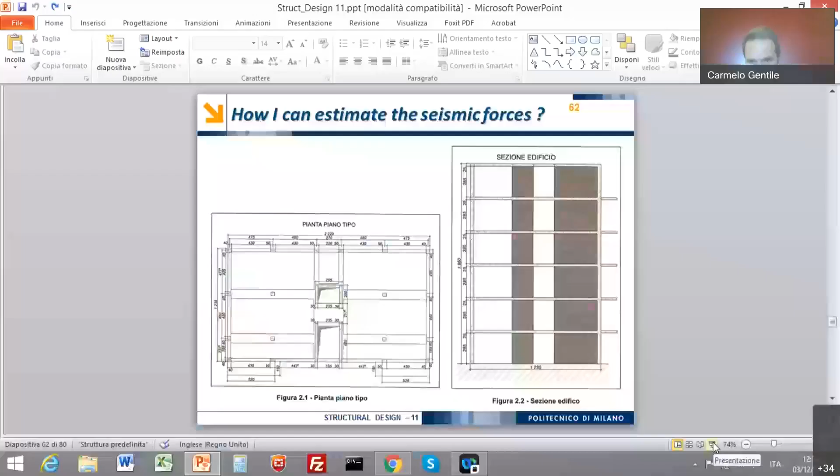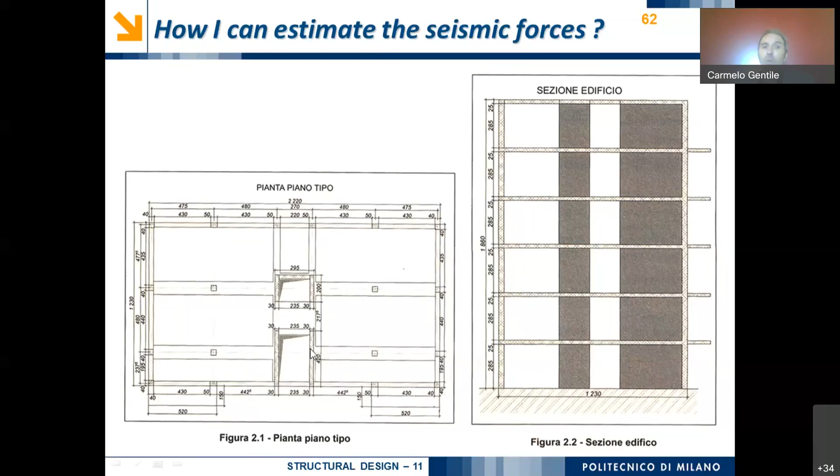The idea is to spend this last half an hour addressing this question: how is it possible to estimate the seismic force. If we want to address a question like this, we have two aspects to consider: first, the distribution along the height of the building of the seismic force, and afterward the distribution between each different frame of the building of the seismic force.

So what we have to do first is this series of subsequent operations. First of all, we are assuming that almost all the weight of the building is concentrated at each floor. For example, corresponding to the second floor of a building, I put the weight of the floor, but I will also include the weight of half the floor before and half the floor after.

What does it mean exactly? Basically, I have some walls. I can assume that half the wall, the floor below, and half the floor after are concentrated at the level of the current floor. So when we compute the weight of each floor, we also have to consider the corresponding weight contribution.

Afterward, we have to estimate or compute, if we are capable of computing this, the fundamental period of the building. Generally, since we know the height of the building, and whether it is reinforced concrete or steel, and generally we are dealing with framed structures, it is possible to estimate the fundamental period T1 from standard codes, from the Italian code, from Eurocodes, and so on.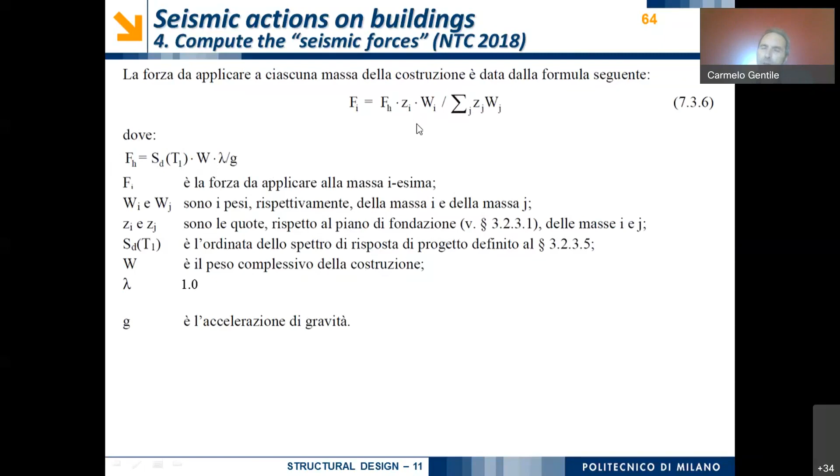A formula like this is expected to give an approximately linear distribution of floor forces. Okay, so something like this.

The force which is applied at floor number i is approximately linear, and depends on this formula. If I have the distribution of the different horizontal forces at different levels, I can obtain the base shear by summing up all these forces, and I can also obtain the base turning moment by summing the value of this force times the distance zeta1, zeta2, zeta3, and so on, where zeta at level I is the distance of floor number I from the base of the foundation.

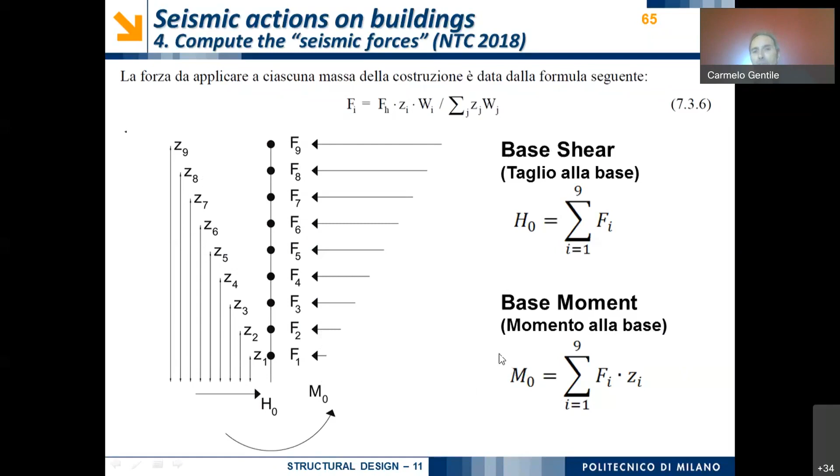So, for example, we have a typical linear distribution of equivalent static loads. In order to evaluate the linear static force, let us refer to a building like this, in which we have computed the different values of the forces at different levels. For example, W1, W2, and W3 are equal to 1,100 kilonewton. The W at the last level is lower than the others because generally we have a different weight for the last floor, but we also have a different height of the lateral walls.

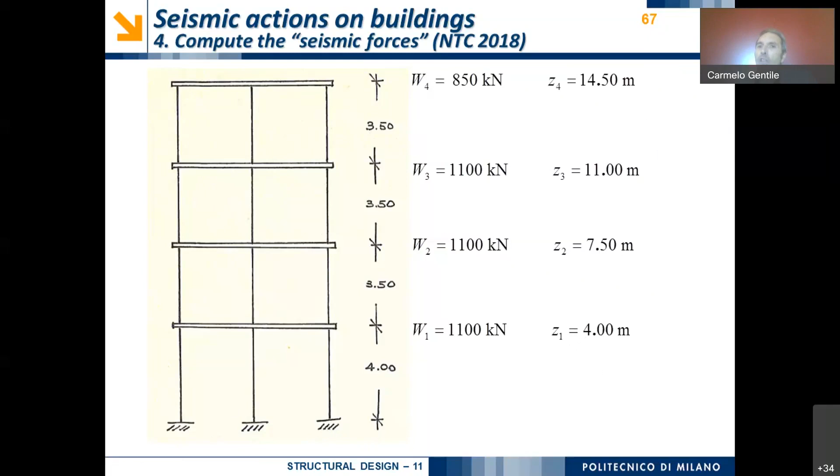These are concentrated at the level of the last floor. In addition, the values of the distance between the different floors from the base of the foundation are increasing. So we are increasing from zeta1 equal to 4 meters to zeta4 at the last floor, which is equal to 14.50 meters. At this point, it is very easy to evaluate the seismic force.

For example, we can do this by using Excel. The first column is the level of our floor, I: 1, 2, 3, 4. The second column is the different weights at the 4 different floors. So the 3 equal weights at floors 1 to 3, and then the weight at the 4th floor.

Afterwards, the third column collects the value of Zi, the distance between each floor and the base of the foundation, so from 4 until 14.5. Afterwards, in column D, we have the product Wi times Zi, and here, marked in yellow, you have the summation of all these elements. So the summation of Wj

times Zj. The last coefficient is the so-called distribution coefficient. So for each floor it is the ratio between Wi Zi over this yellow element. We can observe that the summation of this distribution coefficient is equal to 1, because when we sum all the forces, we have to obtain the

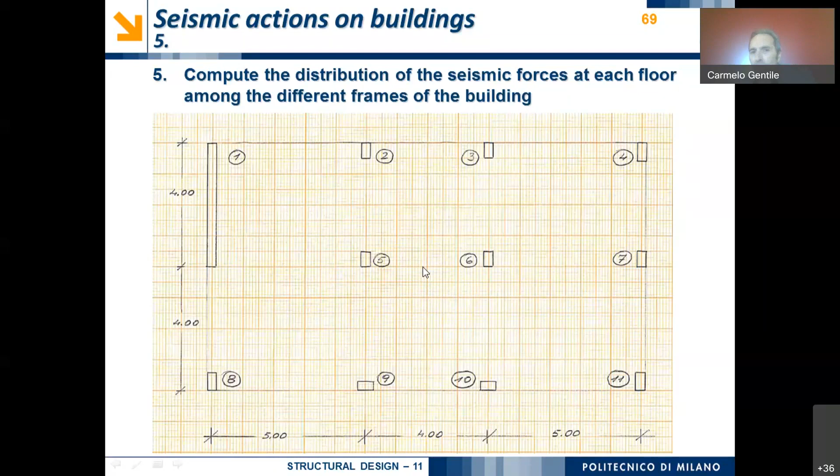But in order to distribute that force among the different resisting elements, I would like to compute the stiffness. If all the columns of one floor have the same height, generally I can refer to the value of the inertia moment in a certain direction of each of the resisting elements of the floor.

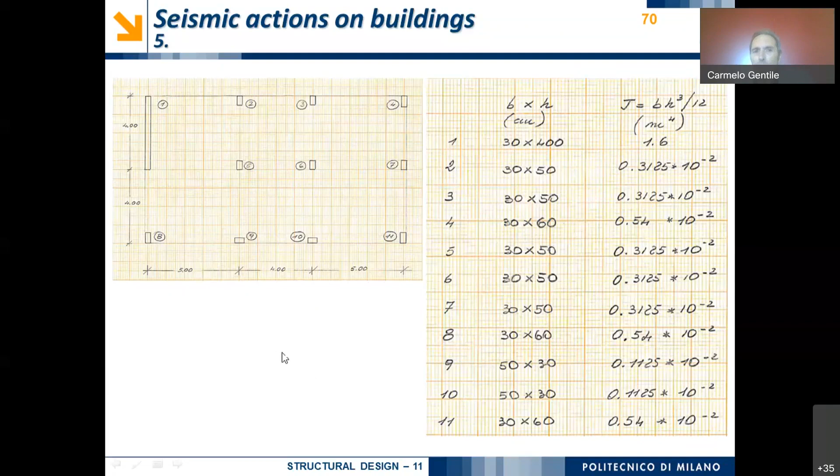For example, here we have a rectangular cross-section which has a width of 30 centimeters and a length of 400 centimeters. So its inertia moment is 1.6 meters to the 4th power. Evaluating the different values of the inertia moment, I can collect all the inertia moments corresponding to each alignment of structural elements. For example, the first alignment of structural elements includes element number 1 and element number 8. The summation of the two inertias, iota 1 plus iota 8, gives an equivalent stiffness K1.

In a similar way, it is also possible to evaluate the equivalent stiffness K3 and K4 corresponding to the other two alignments of elements. At this point, since I have 4 equivalent stiffnesses, and for example I can say that the origin of our system corresponds to the alignment K1, I can compute the position of the center of stiffness by summing up all these stiffnesses multiplied by their distance.

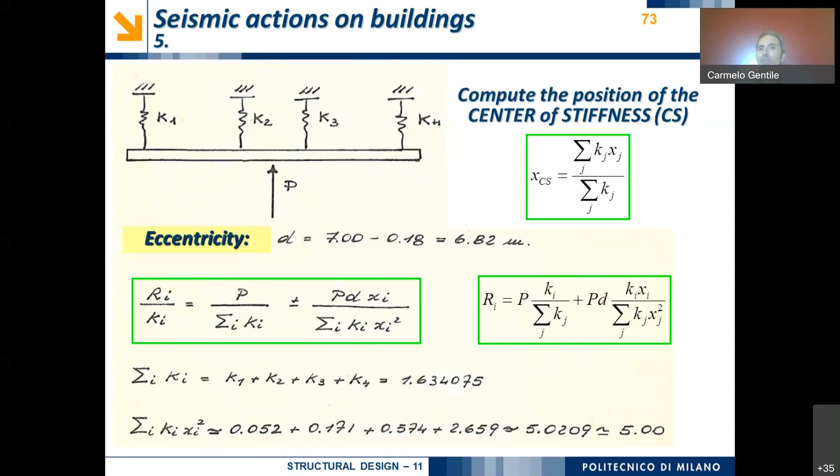At this point, I have an eccentricity which is equal to the difference between 7 - the position of the center of mass - minus the position of the center of stiffness. So we have 6.82 meters. At this point, we can distribute the different actions between the different elements.

Basically, we have the action of an applied force P. If the applied force P is applied at the center of stiffness, there is a uniform distribution of that force between the different springs, or between the different alignments. But we have seen that that force is not applied at the center of stiffness.

It is applied at the center of mass. So the eccentricity, the distance between the center of stiffness and the center of mass, is about 6.82 meters. So there is a bending moment which is equal to the product of the force times the eccentricity, that we have to distribute between the different elements according to their distance.

This formula is basically very similar to the one that we have commented and discussed in bolted connections, related to what we denoted as case 2.

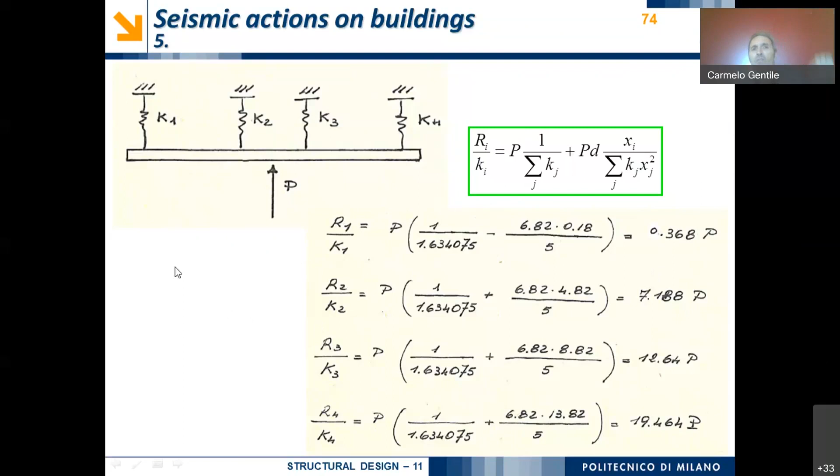Basically, this is another example. Of course, I will send you these examples so that you can very easily repeat the computation we are quickly describing in this case.

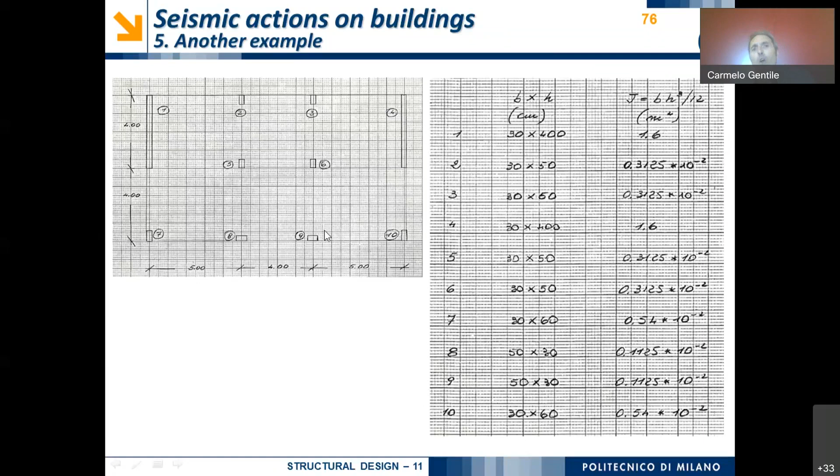You can observe that now the distribution between our elements is more or less symmetric. So we have to expect that the same part of the floor action is supported by the alignment consisting of column number 1 and column number 7, and the alignment consisting of column number 4 and column number 10. Similarly, the distribution of forces between the central frames is basically the same.

Of course, the distance between the center of mass and the center of stiffness, in this case, is equal to 0. And so we can distribute the different forces in direct proportion to the stiffness of the springs K1, K2, K3, and K4.

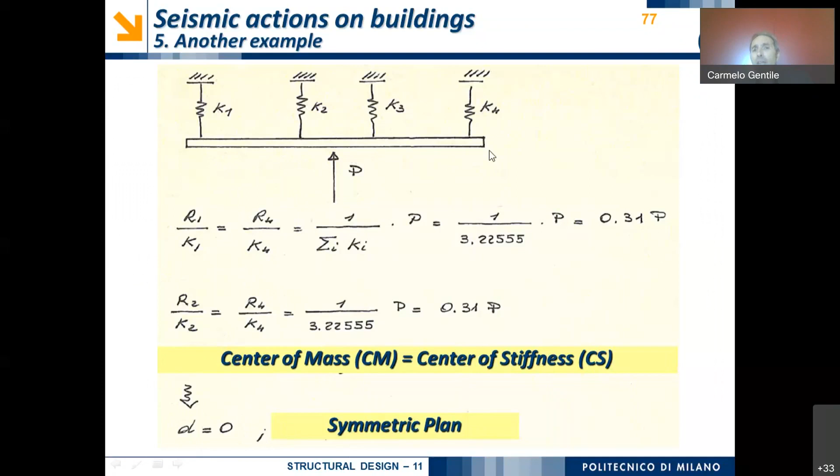If this is the distribution of the different forces, which is quite different from the previous one I explained, you have the distribution at each floor of a structure of every one of the different forces. So at each floor, you have different forces, F1, F2, F3, and F4.

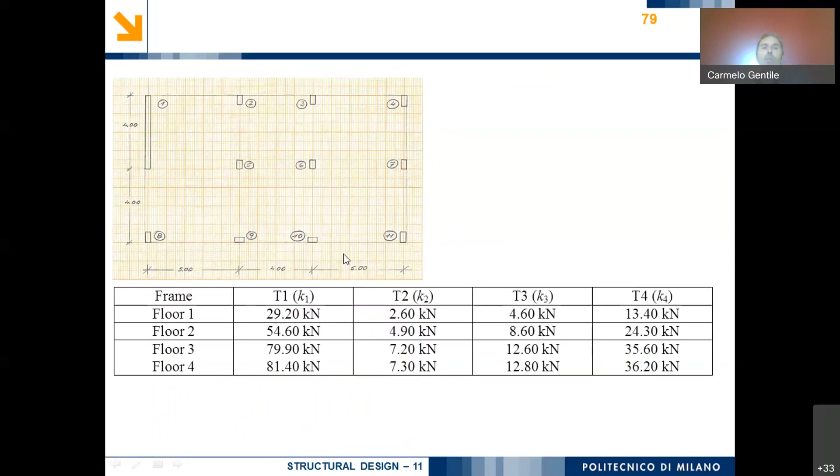This is, of course, the case in which we have a non-symmetric plan. In the case we have a symmetric plan, of course, T1 and T4 are basically the same number at the different floors.